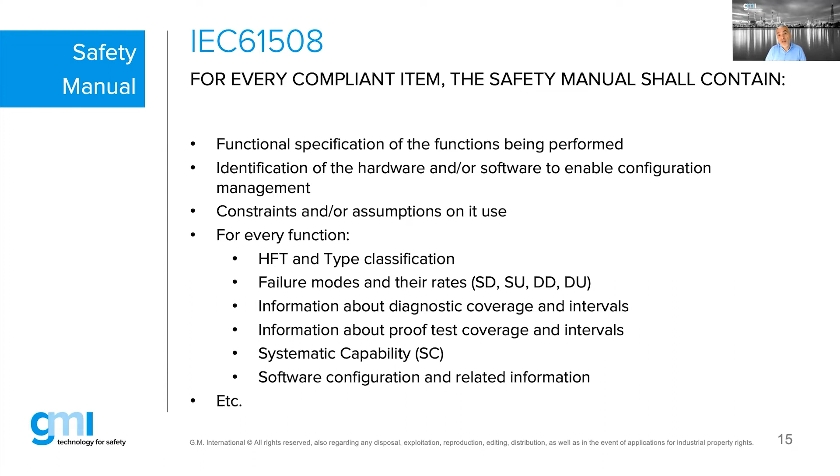And then the second last bullet here is a systematic capability. That is kind of a quality measurement of the rigorousness of design, for hardware as well as for software, which is coming from part 2 and part 3 of the 61508. And there are clear tables in there to show how to control the failures and how to avoid the failures. If the vendor complies with this, they will simply get a definition on their system that they are compliant to an SC1 or an SC2 or an SC3.

For every compliant item, the safety manual shall contain also, if there is some software inside, meaning firmware-based systems, the safety function integrity, what functions are and what constraints and evidence they have proven that the firmware functionality inside the system will comply to a certain safety integrity. The attributes of an element shall be defined, what the integrator potentially shall consider.

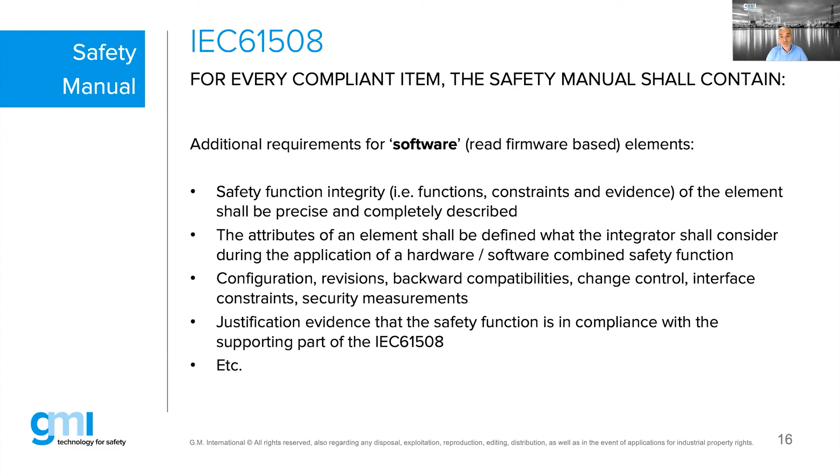Configuration revisions and backward compatibilities need to be also explained inside the safety manual if your device has some firmware. And I'm just thinking about a HART or a smart transmitter. If you have a HART or a smart transmitter, which is of course based on firmware, things like the revision of the firmware that the safety manual was based on need to be mentioned also in such a manual.

Okay, Mauro, we have the first poll question coming in, and I can read the poll question for you. I would like the participants following the webinar to make a selection, and the question is, a manufacturer of a safety product that is compliant to the IEC 61508 shall provide: A, a third-party certificate of the IEC 61508 to prove compliance. B, a safety manual explaining that the product, as per the 61508, is compliant.

C, shall provide you with a SIL certificate and a test report of that certificate. Answer D, all of the above. And to make it easy, none of the above. So which one would you select as your answer to the question, what shall a manufacturer, as per 61508 requirements, supply to you?

And we leave a bit more, but we still have a group that has not clicked the button. There's no prize to win. There is no money to lose. So just give us your interaction, so we know that we are not talking to a screen. There are some people following. I think, Mauro, we're getting close to a good score. I think you can stop, Mauro, if you want. And you can share the results.

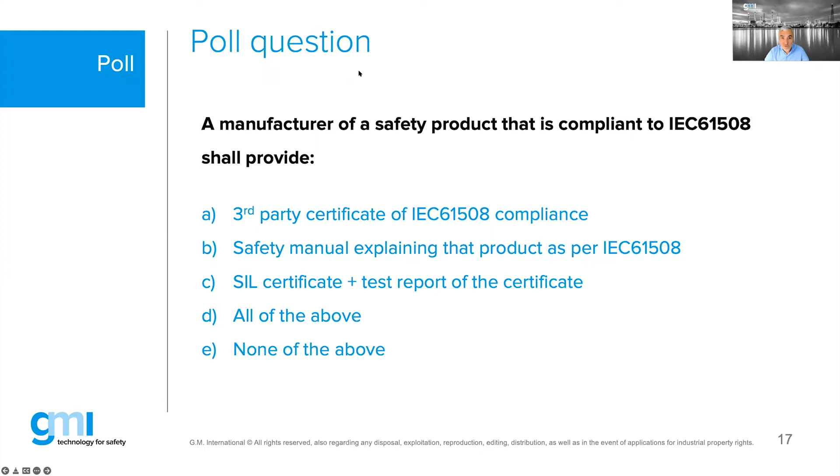So the only thing that the IEC 61508 standard is caring about is assessments. So for SIL 1, independent person, for SIL 2, independent department, for SIL 3, independent organization, and that's it. But what the standard, regardless of the SIL level, always mandatorily requires is a safety manual. And that is the correct answer since April 2010. All right, Mauro, let me go to the next one.

Then the failure rate explanation: they will show you, for instance, all the safe and all the dangerous failures, failure in time, we call this FIT, which is 10 to the minus 9. They will also explain to you the useful life, etc. of such an interface.

The second topic here for today is still in the same context of safety manual, but what many people do not know yet is that edition 2 of the 61511, which is actually out since 2016/2017, so the current valid edition for the process industry to achieve functional safety with a safety instrumented system, is now requiring, in addition, a functional safety manual. And I want to underline the words functional safety manual.

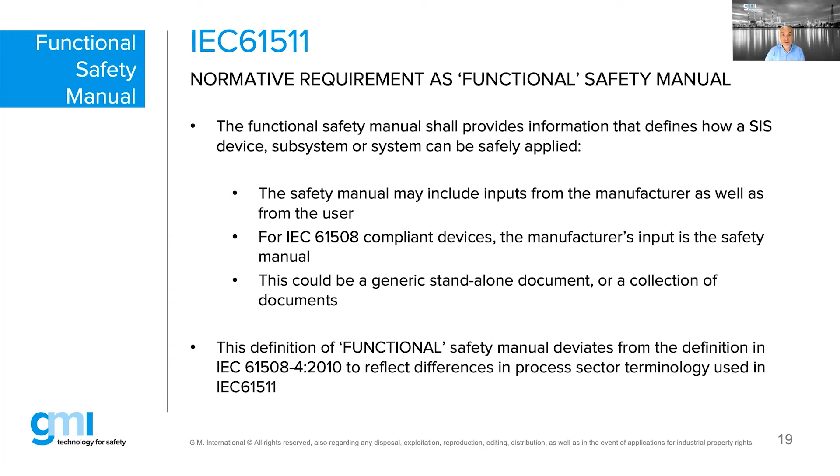And the definition of functional safety manual is deviating from the definition of the IEC 61508, which is in part 4, the abbreviations and definitions of the standard, because they want to differentiate that functional means it's coming from the process sector, process industry, whereas the safety manual is coming from the manufacturing industry, which are two totally different contexts.

So the functional safety manual purpose is, as I told you already, to help the engineers, the end users, the operators of the SIS, and the maintenance people of the SIS to prove that they can still achieve the target SIL performance of that specific safety function.

It is certainly customized, so it can be done either with the system integrators who are integrating the systems, or if the EPC is doing a turnkey solution, it can be done by the EPC contractors themselves. They will have to collect all this good data and filter it down into a document called a Functional Safety Manual, customized per project, per client, per SIF.

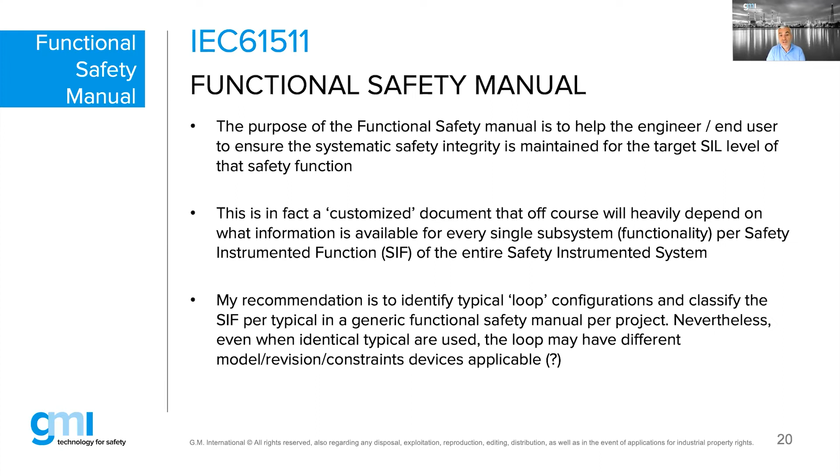My recommendation is to identify some typical loop configurations; for instance, you could say we have a 1 out of 1, we have a 1 out of 2, we have a 2 out of 3, etc. And as per templates that you will then consider that you can use in that project, you could then make an additional data sheet that is referring to that template. That is just one of my recommendations that I would like to give to you.

So all depending on the mission time of your SIF, that needs to be customized, and based on the availability and on the risk reduction factor that you require on this loop, that will actually identify in your functional safety manual information to the maintenance engineer on how frequently they have to test that type of safety instrumented function.

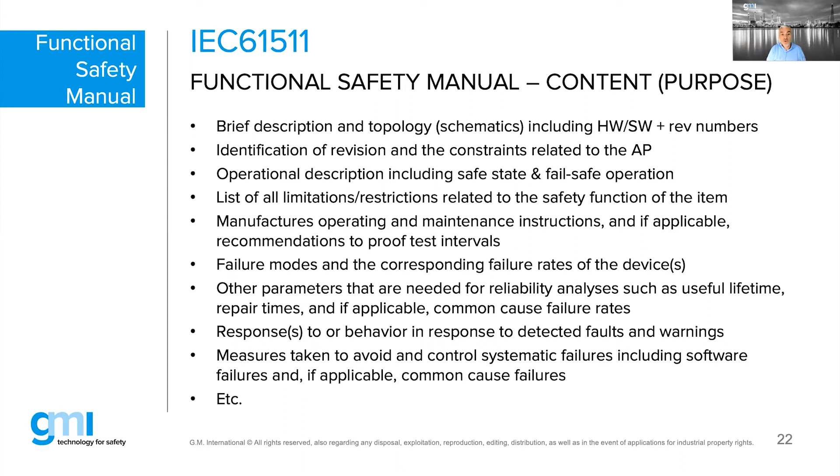All right, Mauro, we are on the next poll. Oh, we don't hear you, Mauro. I don't know why. Maybe you turned off the microphone. I see your lips moving. If you can just share it, I will read the question for you. Okay, I still don't hear you, Mauro. Do you still hear me? Yeah, I can see that you launched the poll. Okay. Doesn't matter, we will manage.

Okay, so a project that needs to comply to the IEC 61511 standard and is using only IEC 61508 compliant devices. So this is a bit of a tricky question here in this poll. You have a project, you have to comply to the 61511 edition 2 standard and are using purely, one by one, all your subsystems as 61508 compliant devices. A, per device, a safety manual is required. That means per subsystem or per device, you need to have a safety manual.

B, a functional safety manual is required on the SIF or SIS level. C, both A and B above. So you need to have a safety manual per device, and you need to have a functional safety manual provided on the complete SIS or SIF level. D, none of the above.

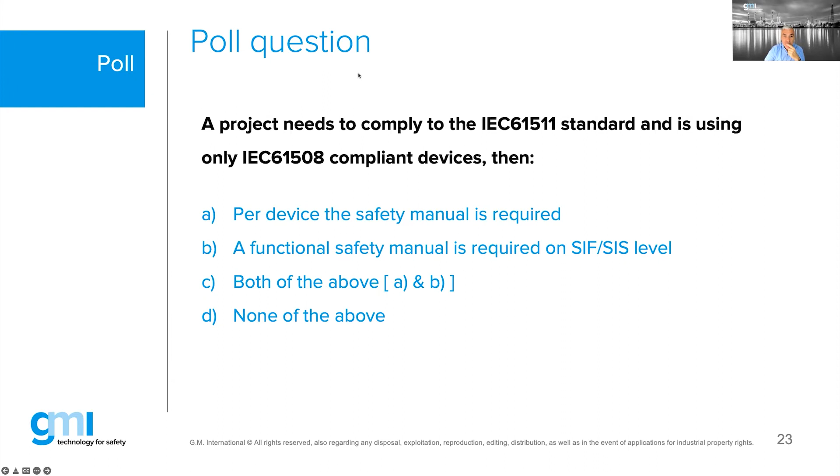Okay, I will end the poll because it looks like it doesn't work. Sorry for that. I see that people are reacting. So one could answer, the other one could not answer, which is strange for me. But anyhow, let's see if Mauro will come back or not. Yeah, I see that some people have trouble. So let's just forget about the poll. It's just to see if there's some interaction, but apparently we have some difficulties.

What is now the summary of today's webinar? I want you to understand the difference between a safety manual for the manufacturers, like as an example GMI, which is the 61508, edition 2, 2010, versus the functional safety manual, which is the IEC 61511, the 2016-2017 release, which is edition number 2.

And the safety manual, as I told you in the webinar itself, it is not a requirement from the IEC 61508 at all to have a certificate. Certification between vendors is purely to prove a certain, let's say, status, or to try to create some competition between each other. The IEC standard does not even know the word certificate. If you would search the 61508 for the word certificate, you would not find anything.

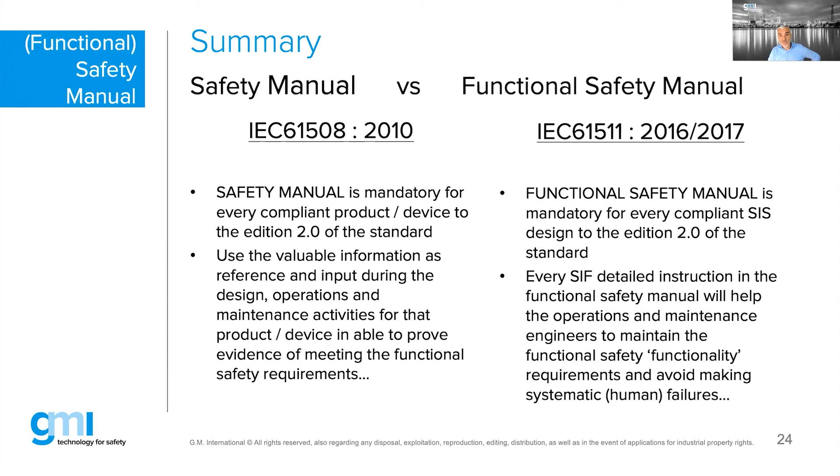Every single safety instrumented function shall have detailed instructions. And I know that sometimes people will say, well, actually, that's an overlap. We already have that information sitting in our safety requirement specification. It doesn't really matter to me how you call the document, as long as the end user or the maintenance engineers know exactly how to prove that their systems are still in compliance with the risk reduction factor performance that was estimated you would need to prevent the hazard from happening in the field.

As Mauro was saying, we also had this last icon on the product slides, which is not a product but a service. So we do provide you with 61511 lifecycle support. We are actually currently still providing functional safety management to some of the customers, because functional safety management is a normative requirement also from edition 2 of the 61511.

We also have specific project-related business. We are helping with the PHAs. We are doing some LOPA. We're doing some prediction of availability of systems by SIL determination and also some SIL verification. We also sometimes assist, not so often anymore, with safety requirement specification. And we also have another group which is specialized in industrial security management and assessment based on the OT security standard, which is called the IEC 62443.

Besides this, one of the roles that I'm helping GMI with is providing the TÜV Rheinland accreditation competency review program called Functional Safety Engineer SIS. I'm actually due at the end of the year to make a complete summary of all the training that I have provided. But I estimate somewhere around 190 trainings worldwide over the last 15 years, and about 2,700 people that I've been training myself with this program.

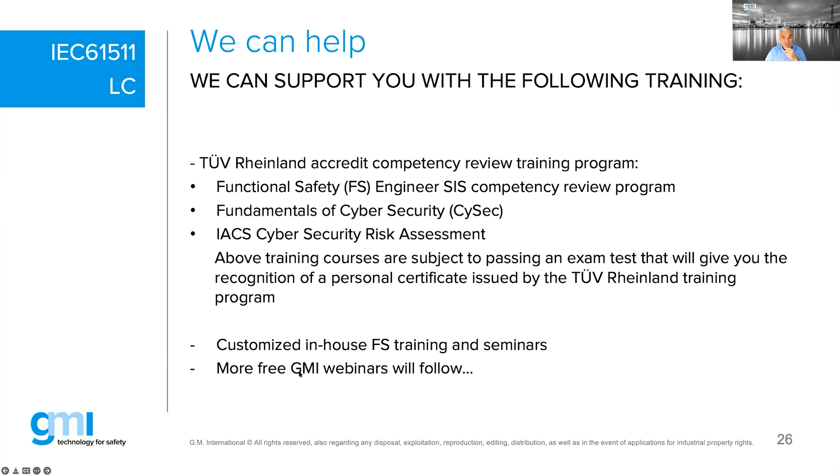We also do customized in-house trainings. As I was just explaining, I'm actually with a specific company now worldwide. We are launching in-house trainings for all their teams who are involved in activities for functional safety. And next year, we already have a new schedule for 2022. We will provide you with some more webinars to follow.

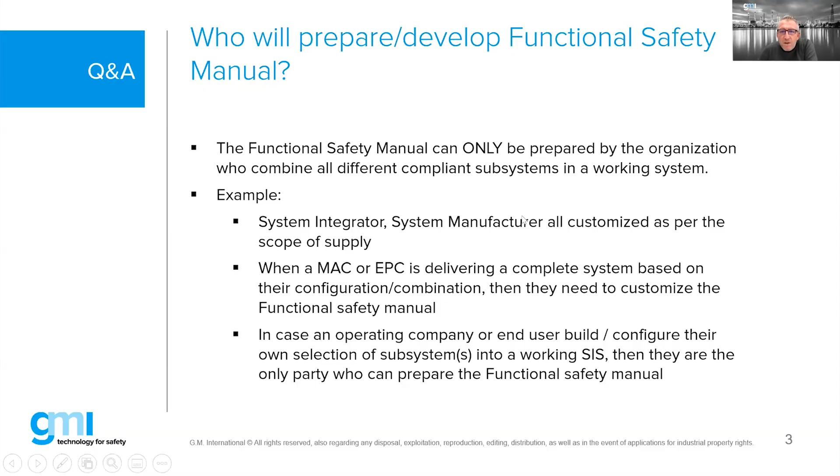What is the purpose of a safety manual and what information should it contain? Well, I actually recognize that question and I know that I already have answered, but it may not hurt that people will hear it twice. So yes, Mauro.

Okay, for every single IEC 61508 compliant device, as already mentioned, the manufacturer shall provide you a safety manual. There is no excuse, there is no but. If you have a vendor selling you a device or a unit or a product without a safety manual, it's not an IEC 61508 compliant vendor, period. The definition of the safety manual comes from a standard. Please note that some manufacturers are combining or merging the normative safety manual information sometimes in the instruction manual.

So I've seen different vendors where they have a title on the document and it may be called installation guidance / safety manual. So sometimes they will mix that good information into one document, but the safety manual information is normative in Annex D in both the hardware section part 2 and the software section part 3 of the IEC 61508. And there is no excuse for me.

If I have a vendor claiming SIL X, I will search where can I find that data. And if the data is somewhere in a document without the title safety manual, I'm not really getting worried so much. But I'm more worried if I don't get the data as per the standard. And that is always what I'm trying to refer to. You shall be provided with that data regardless what the title of the document is.

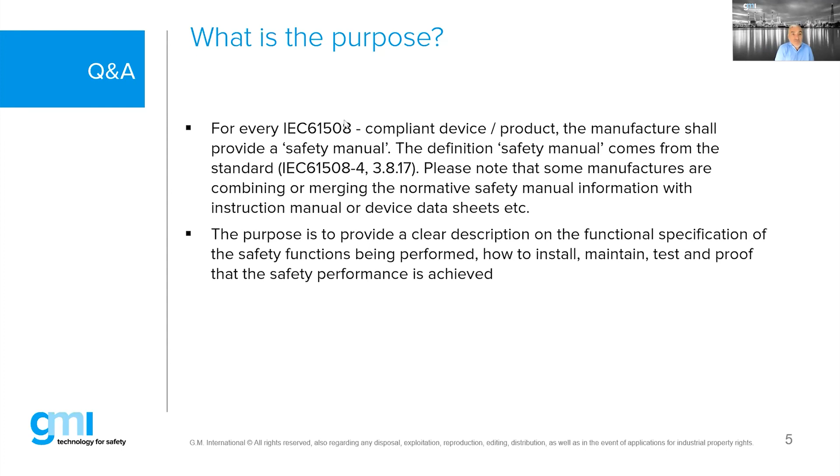Yes, Mauro. Let me try. Here it is.

IEC 61511 is the wrap around of IEC 61508. Okay, I'm just trying to think about, is it the wrap around or is the 61508 the wrap around the 61511? Then why are they different from each other? Oh, okay, well, I think that's an easy one to answer. The first one, the top one, the 61508, I call this a neutral standard.

Because in the automobile sector, more and more, the modern cars are full of electronics and they have to build those electronics also very reliable. Otherwise, the casualties, or let's say the fatalities, could be worldwide, could be tremendous. That is why they have to try to build those cars as safe as possible.

Of course, you are still the driver. You can still be a bad driver, crashing and killing people. But the reliability of the equipment, like for instance, if you have the modern cars full of electronics and microchips, they have to make sure that those will not cause any problem for your car.